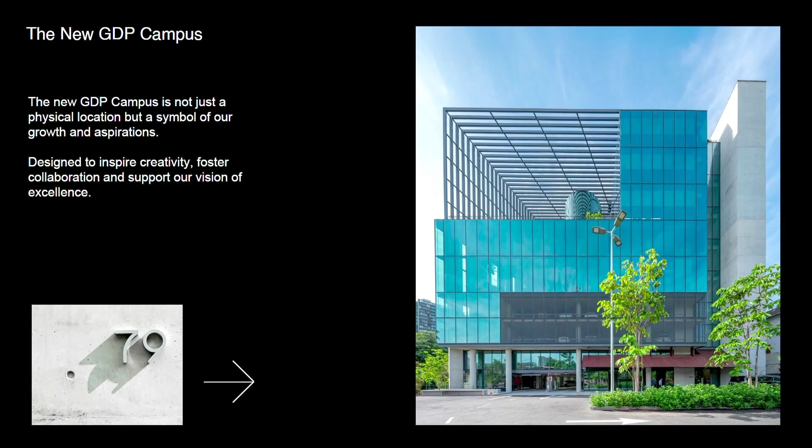So the GDP campus is not just a location. We designed it with the intention that we want to inspire creativity, foster collaboration, and support the vision of excellence. The main thing of putting all GDP employees and staff together is really to encourage collaboration and allow us to work between the floors and between the different studios that we have.

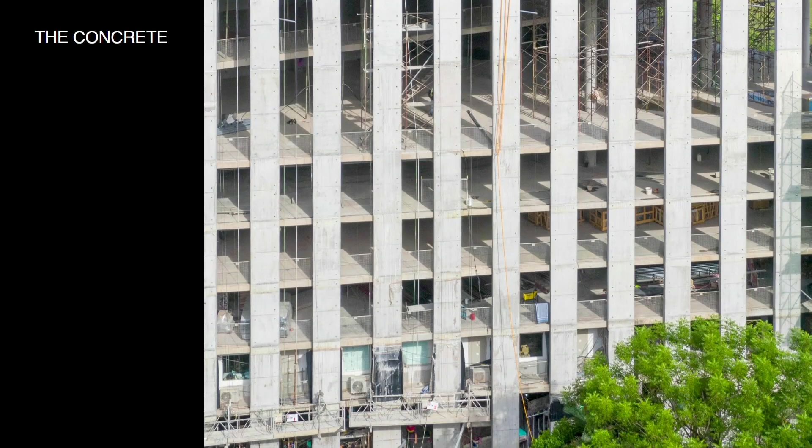So I'd like to talk a bit about the design intent of the project. When we started the project, because it's a project by GDP for GDP, we had the intention to explore raw material, exploring how to push the boundaries for concrete, steel, timber, and glass. So today I will talk about the concrete, which is the title of the presentation today.

Regarding the concrete, what is good to note is that we use different concrete grades for horizontal members and vertical members. The horizontal members, which are the slabs, are in grade 35 concrete, and the vertical members are in grade 50 concrete. I think Pekha will explain more about the concrete strength and how concrete grade is important here.

The formwork. The formwork is what characterizes the concrete that we see. It is the formwork that gives the surface finish, because the formwork, similar to a cake, is the mold. It then reveals what we'll see underneath it.

For this project, there was a lot of discussion about what type of formwork to use, and we moved forward with the Peri formwork, mainly because of its modular system, its quality, its straightness, and the durability and possibility to reuse. Peri formwork can be reused roughly up to 8 times.

What is interesting about the formwork is that we have to be very mindful of the panel sizes they come in, 1220 by 2440, and how we have curated the entire concrete envelope, including the structure, to align with all these alignments.

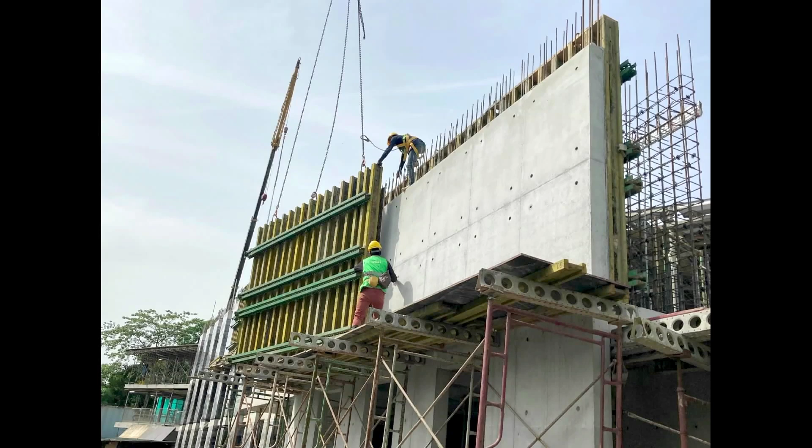This is some process showing how the concrete is cast. You can see some detailed drawings from the contractor showing how the formwork is put together and held in place. There are supports, tied together by tie rods, before the rebars are placed and the concrete is poured in.

In this project, we tried to get rid of the double joint line created by the slab, in order to see a smooth transition and consistency across the big paneling of the elevation.

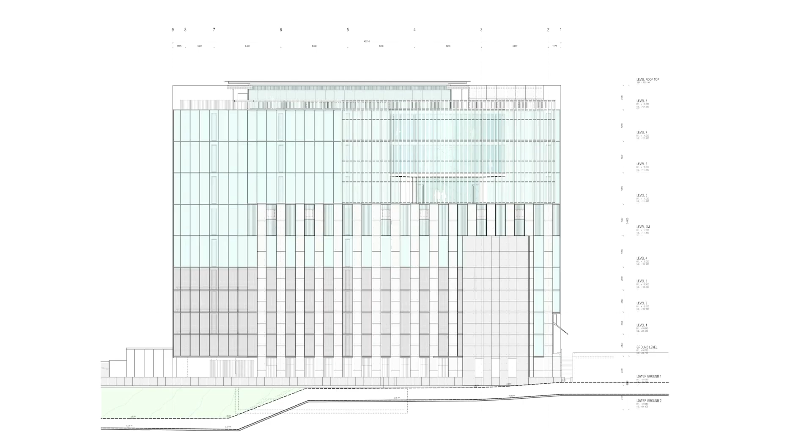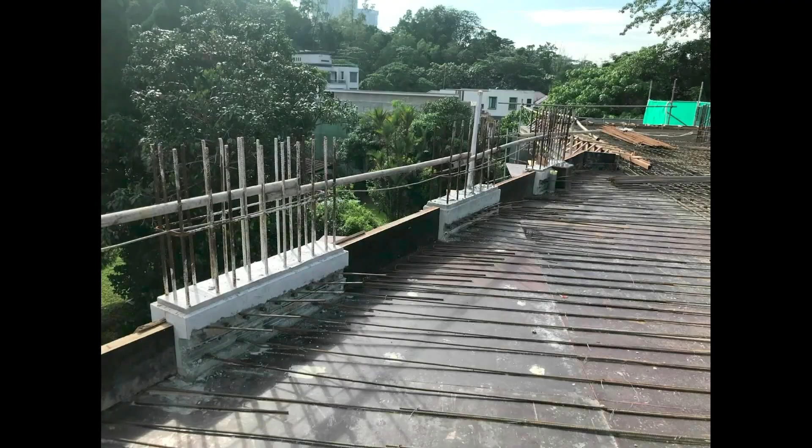This image shows the finished column with the concrete cast, and you can see the coupler box embedded in there. What we need to do is hack out the concrete around the coupler box to remove this polystyrene coupler box. This is the situation after it's been removed.

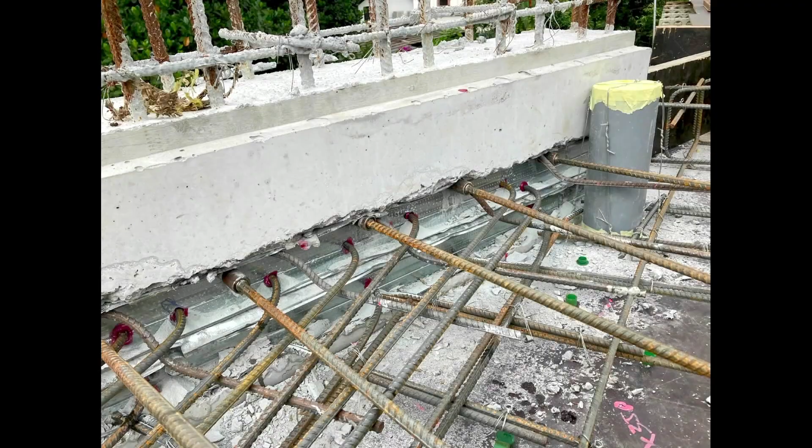You can see there are a lot of couplers there, which allow the rebars to be inserted so that the rebar previously planted within the column is continuous, joined by the coupler into the slab. This image shows how the double line from the slab is not shown on the elevational concrete wall.

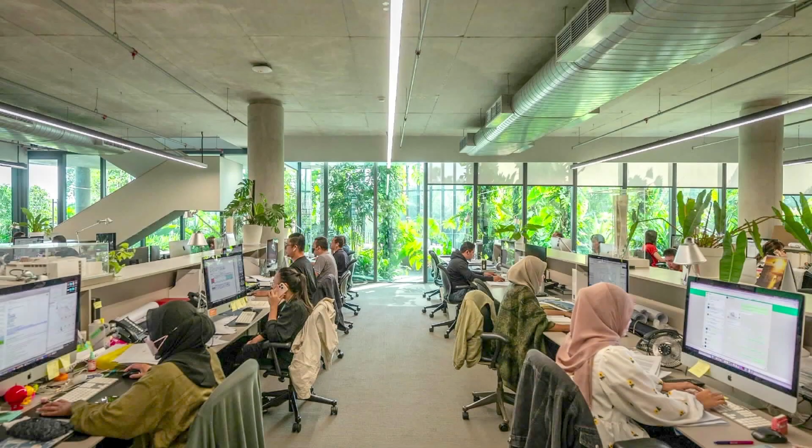You can see that we even decided how to set out the formwork, which imprints these joint lines onto the soffit of our exposed ceiling. Decisions were made from the car park level up to the office level. These images show the joint lines interacting with the facade lines. That's a double volume space on level 4.

Similar in the car park as well, interfacing with where we have the van block. So, talking about the image here just now, the team, we have decided to proceed with a flat slab without any beams. The whole reason is to allow a free interaction and organization with the MEP services. Okay.

So I think on the flat slab, Becca would give you more information about the pre-camber slab. She will possibly talk more about that. So this is an image showing how a flat slab was incorporated in the design to allow the services to be arranged with the concrete.

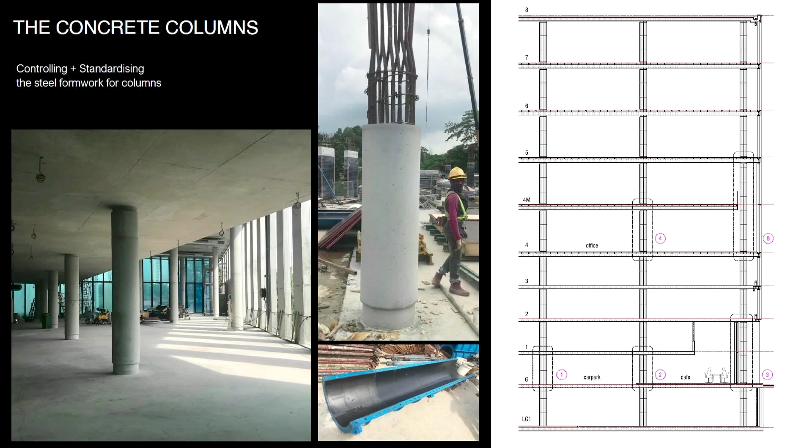Columns. Columns is another challenge that we face in the project. Different from the beams, different from the square columns or the casting of the wall and the slab, these round columns, we use metal formwork, okay? And there was a lot of discussion about sizes, yeah? Sizes and how many modules in order to meet the most cost-effective method.

Okay. So like I mentioned just now, there are a couple of column modules that have been designed into the project. On the ground floor, we have modules with necking and without necking of different height, and mainly it's about different height. How we standardize this is to keep them to certain sizes and allow the formwork to be reused on different levels by adding props to the bottom and the top for the necking.

Okay, we made a decision to ensure the 1220 height of the joint, in order to allow it to repeat itself, being different from the envelope of the building. So you can see how the columns sit more individually. If you're in the space, you could read the joint line differently compared to the envelope.

Okay, so after the column finish and all that, I just want to show this image about the protection that has been put on all the concrete on site. This is mainly about the protection towards the air, water, and damage that might potentially happen on site.

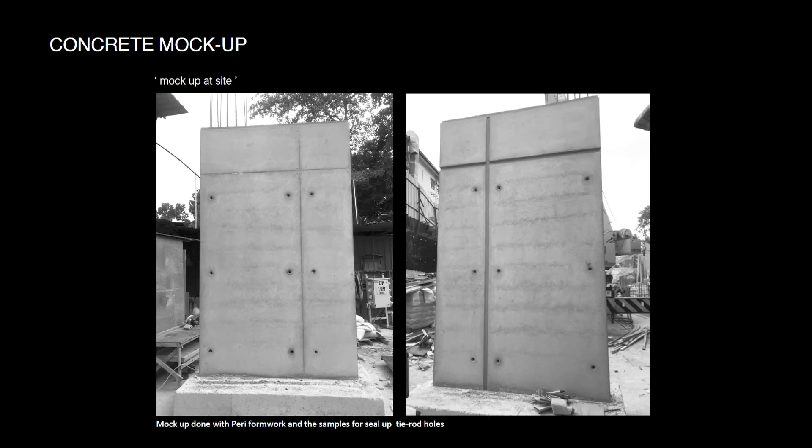The tie rods. Those are all important, and those are great conversations that we have with the contractor, because they have a certain distance that needs to be kept from the edge of the panels. Okay, so from there, this is a good result that we achieved before we moved on to the concrete construction of the project.

This image shows the string there, which is showing the setting out of the tie rods, as well as the bottle there, which is an important factor for the concrete construction. This is the formwork oil, which is applied on the PERI formwork as well as the metal formwork for the concrete column. With the application of this oil, brushed on, it allows easy removal of the formwork.

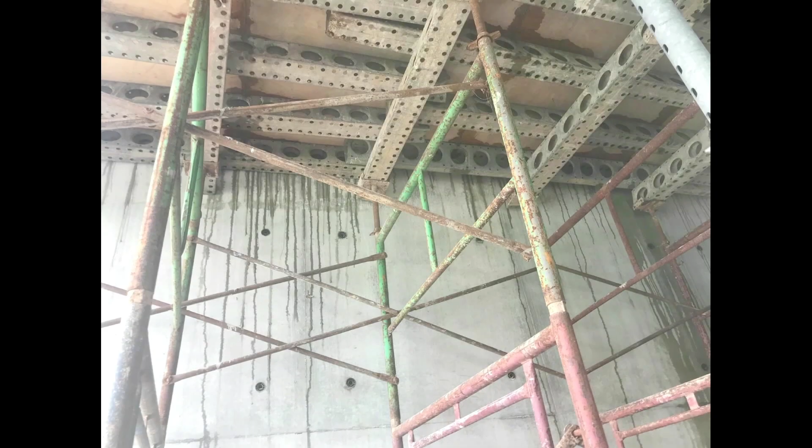Similar to this, concrete dripping that is formed from the foam and the sponge, as we call it, that is integrated during the casting of the concrete within the formwork. Yep. Another defect that was quite major in the project was honeycomb. There was one column where there was significant honeycomb.

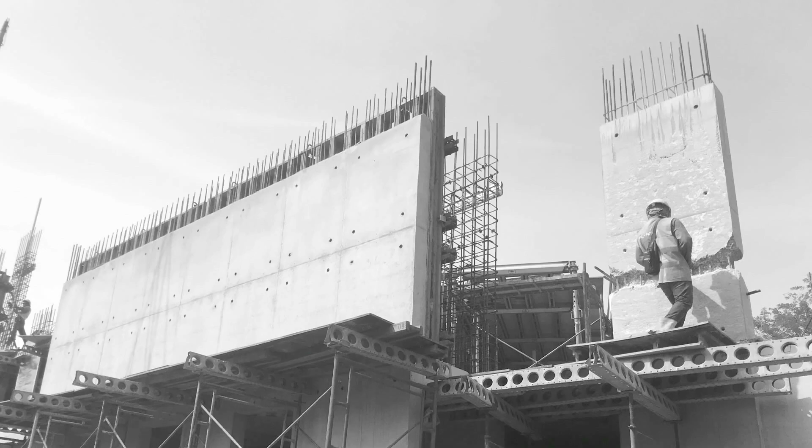Okay, you can see on the bottom part of the column, where we then took a decision to demolish it. And the demolition process is not simple, because you can't demolish the entire column easily. So what the team have done is to demolish almost the lower part of it, then cut off the rebar, and you can throw away the top part of the concrete column, and the bottom bit that's left will be hacked away, and then a new column will have to come up.

What these gentlemen are looking at here is a cold joint. A cold joint that happened on the grade 50 concrete due to the timing of the pouring. So when the concrete is poured too late, a cold joint will happen. So what is interesting here is you see this worker here holding a dryer.

So there are some repair methods that we have implemented in the project. Okay, some special technique from Al-Ambia. Yep, it's very interesting, but I think it's sort of a trade secret. What we do here is with this repair method, we are able to bring the concrete back to a more aesthetic and appealing scenario, similar to off-form concrete and fair face concrete.

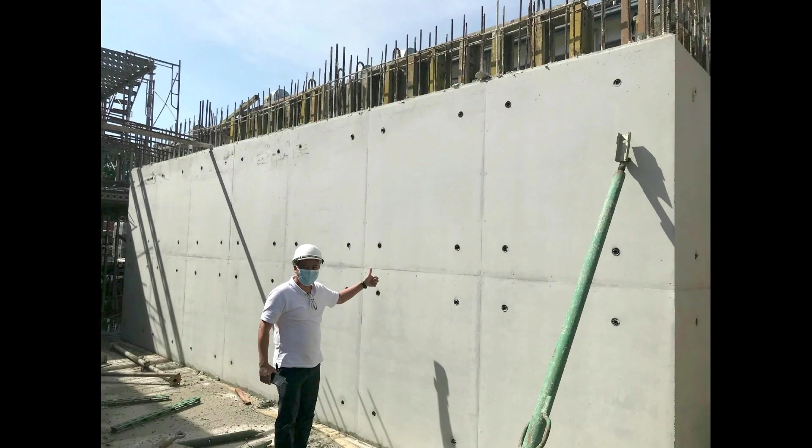Yeah, so a colleague here giving a thumbs up. I'm not sure if you can see here in this image.

What is also interesting is the setting out of the nails. That's also another huge discussion between the architect and the contractor in where and how and aligning all the nails in order to make sure of the alignment and how you feel when we are next to the concrete wall.

Okay. Next interesting part is the tie rods. So all these holes that are formed from the tie rods of the formwork. This is just showing two different tie rod shapes, formed by a straight tie rod and a round tie rod. This is what we did to study this during the mock-up session.

Another major decision that we have made is relevant to the implementation of the surface sealant on the exterior concrete. What we want to achieve is a continuity of concrete between the interior and exterior. However, due to the requirements of our weather, from rain and water, there is an important layer, which is this water repellent layer, which is being applied on the surface of the exterior concrete.

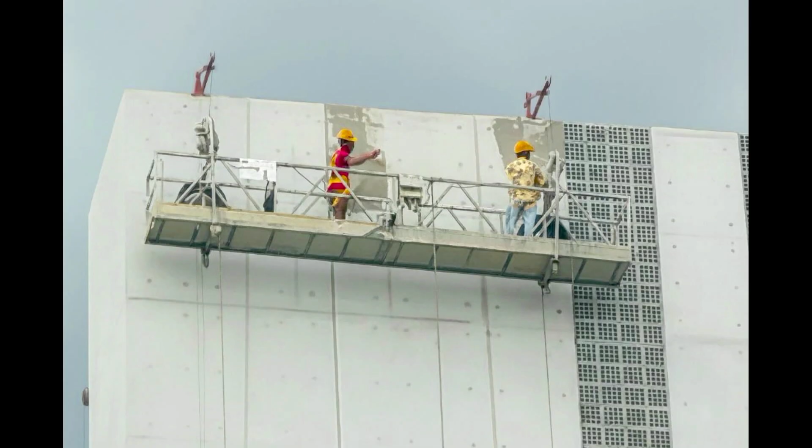So what is interesting about this surface sealant is that it is sort of a transparent layer. However, when you apply it, it creates a creamy looking aesthetic, which, you know, do not be too afraid of, because over time, within the next 28 days, it will disappear and be absorbed into the concrete. So in the end, it will give a very transparent look, which is shown in our project.

So like a lot of concrete construction in KL, what is important is the coordination, early coordination between the concrete and all the other elements of the project. Besides the concrete, the glass facade forms a big part of the entire GDP campus. So there's an important need to create this coordination in terms of design and alignment, which I mentioned just now, as well as a lot of cast-in that we have to do in order to allow the facade to be supported and sitting properly on the perimeter.

Next big thing that the capsule can show very greatly is the coordination with structure. So besides the concrete structure, there is also a steel structure which is embedded within the capsule. The steel structure is only on the slab level because there are steel beams being incorporated within the concrete, as well as gelling together with the concrete columns on what we call the landscape level. And this structure is then supported by slim steel columns. You can see here on the first and second level.

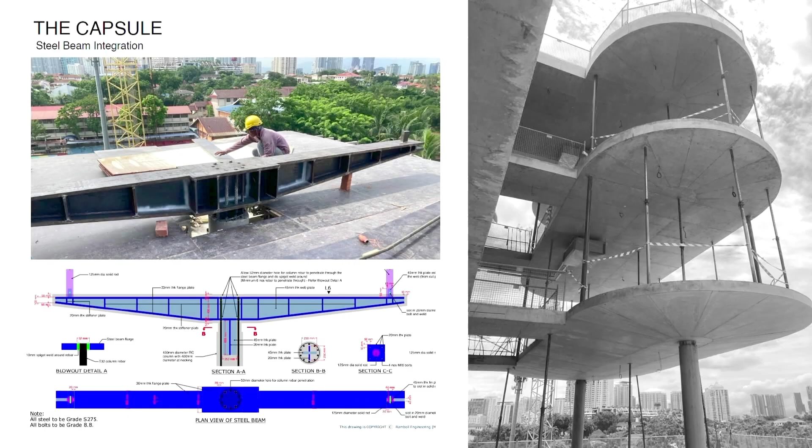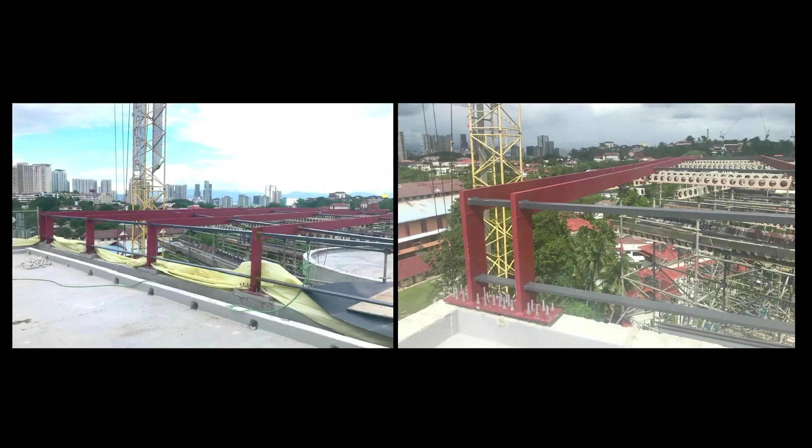So what we have here is this steel structure, which from this sketch you can see that there are some cast-in bolts as well as post-drilled bolts in order to react to the condition on site. Yeah, on the landscape level and also on level 8, which are the two locations supporting the steel trellis. Okay. So that's the end result, where you see the trellis from level 9.

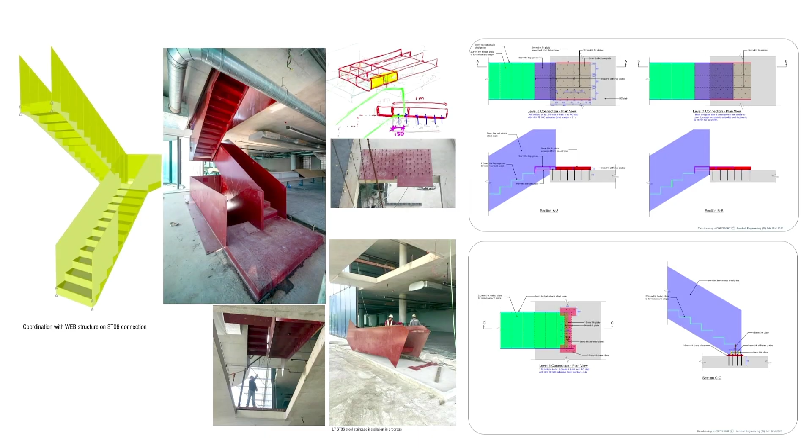Now that we talk a lot about how we want to encourage transition between our people, our staff, the steel staircase, which is within levels 6, 7, 8, which is our office level, is a very important circulation to allow people to move around and collaborate. Similar to other engineering of the project, this is another marvel where the bolts are post-drilled onto it. Some site photos, working with Pek Har and the team.

Okay, so in a concrete construction, and especially in a high-rise, not too high for the GDP campus, one interesting part of the project is the lift. It's a lift that runs through all the levels. And the contractor did a very good job in the plumbing and setting up, in order to get a straightness for the shaft, for the lift car, as well as the lift openings for the doors to be incorporated. So I think there's a lot of discussion on this, a lot of coordination, but at the end of the day, the plumbing line was the one that allowed things to be set out accurately.

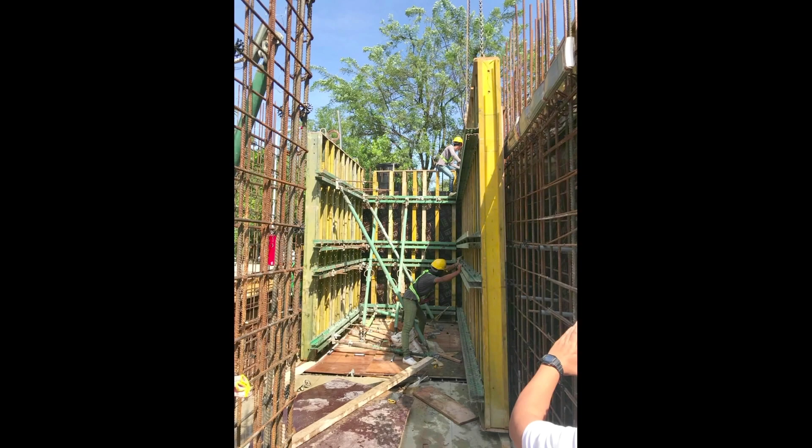Some image showing the formwork within the lift shaft. What we have used is integration of this stainless steel plate as well as some grouting in order to absorb the minor discrepancy in between each level. However, the doors, the lift doors, will still have to be set to be accurate for every single level.

This image here shows people standing around here looking at the ceiling, looking at the soffit. What is going on here is a mock-up. It's a mock-up where we put together the services in order to understand things that we would be integrating within the concrete structure and things that would be exposed. Okay.

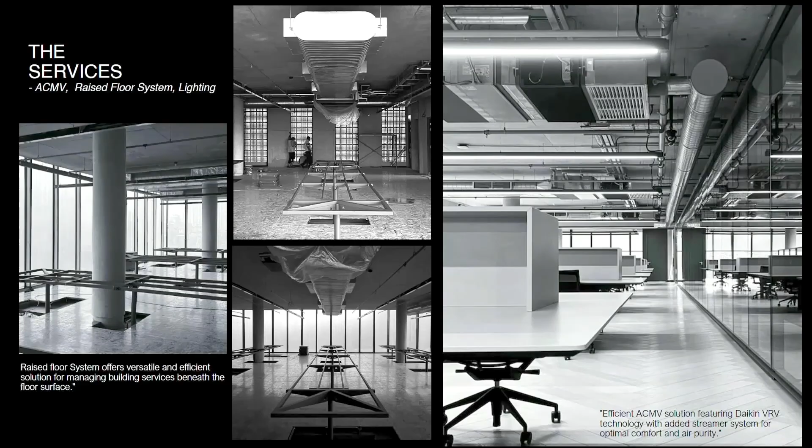Yeah. So here are the services. The ductings, some fire sprinklers, pipes, and some cables, mainly the fire services, which are exposed. Lighting cables, you can see here, are being integrated within the concrete slab. Similar to socket boxes, electrical socket boxes being integrated together with the concrete construction.

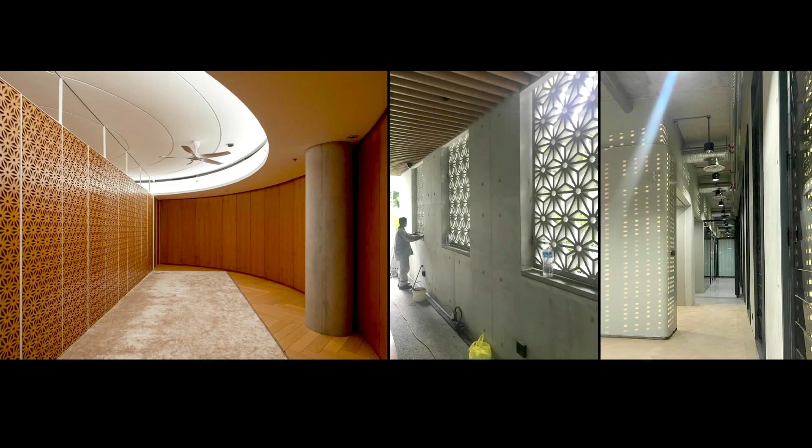Next is the ID part. There are IDs which are being designed and integrated together with the entire concrete framework. Other IDs in the project? Yeah, so I think the way we look at the GDP campus is to create a balance between the use of concrete as well as all the other elements in the project. Okay, so to review how the concrete could be a backdrop as well as supporting the whole design intent, working together with all the alignments in the project.

You can see here the landscape area. Level 4, which is the meetings area and public area.

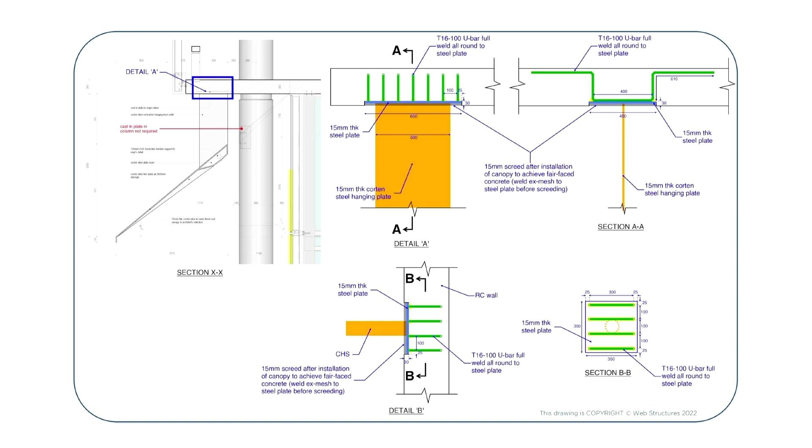Talking about the entrance, this is another integration that we have worked on together with the structural engineers in order to cast in the structural members before the casting of the concrete. You can see here how the steel support is being cast in, where these rectangle holes will then be filled up, covered up to create a continuous look between the concrete and only the slim profile of the metal, like achieved in this image. Okay. All right. Thank you.

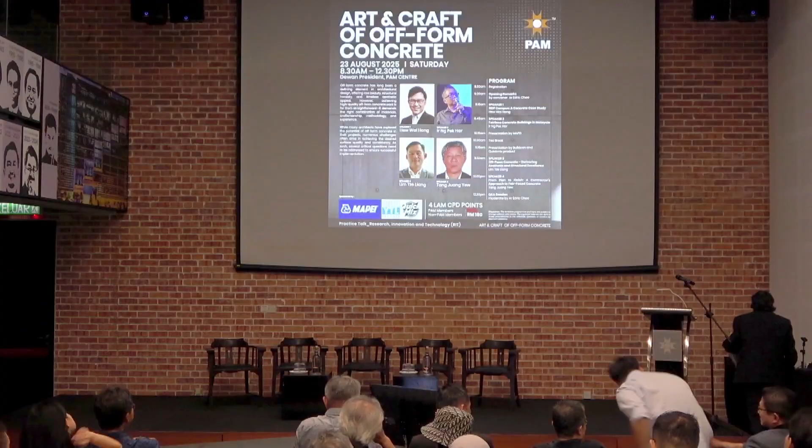Thank you once again, Mr. Hew Wai Hong, who graduated previously, as mentioned, from Bartlett, UCL, with a Master's in Architecture and became a registered architect with ARB in 2018. He joined GDP Architects in 2020 and recently worked on the Apple Store and the wonderful GDP campus you just saw a moment ago. So let's give him another round of applause. Thank you for the insightful presentation.

Up next, our second speaker is Engineer Ng Pek Har with a presentation titled Fair Face Concrete Buildings in Malaysia. So a little bit of a bio before I formally invite our speaker. Together with Dr. Hanif Kara... Web Structures' founder, Pek Har started the Web Structures Kuala Lumpur office in 2004 and built the Web Structures reputation in Malaysia until January 2020 when Web was acquired. She continues her passion in design, and without further ado, I'd like to invite Engineer Ng Pek Har to please come on stage to give her presentation.

Okay, the second thing that was really very interesting for us is actually the trellis. I'm not boasting, I need to say this. It's a triangle shape on plan, but at the long span, the span is 22 meters. It goes across 22 meters like that, right? And guess what? It's only a steel plate that is 200 mm deep. So there's no engineers here, I suppose, except for Mr. Lim. The slenderness ratio is 100. It's crazy. The slenderness ratio is 100, when something is considered slender when it is like 30 or 40.

And the thickness of the steel plate is only 45 mm. In fact, it was so wobbly, and the steel plate comes down to the very tall columns you see going up, so wobbly that the steel fabricator, Mr. Tang, you recall, Pelanta Insan, refused to bring it to your site because they said it's so wobbly they can't even load it onto the lorry. So I was dragged by GDP all the way to, I forgot where, to load these things and to say that they are okay. So that's my memory of this project.

Okay, I think I better start my talk. Okay, how do I do this? Press. Okay, is it here?

Fantastic builders. Actually, after the era of Julius Caesar, the knowledge of concrete was lost for more than 1,400 years. That's why you see there were no great buildings until a huge revival around the year 1840, the 19th century, because an English gentleman, sorry I forgot his name, Joseph something, invented cement as we know it today, Portland cement, because the look and the texture of it looks like Portland stone in the UK.

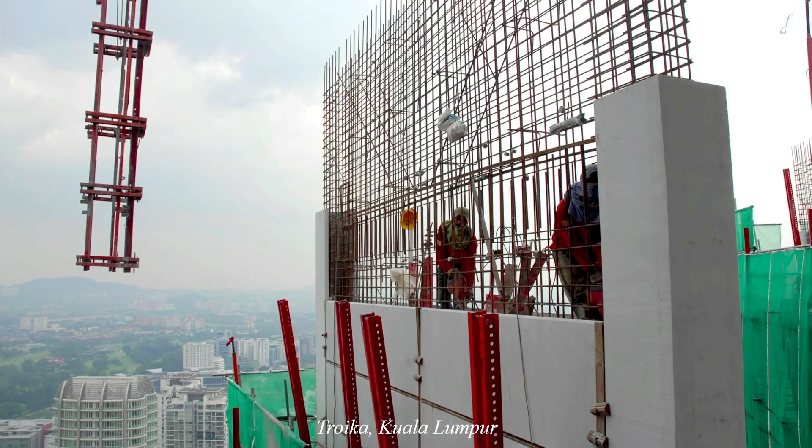Okay, you see this? I think it's not allowed today to have men inside the rebar cage, okay? But this is 2005. So in 2005, the first thing you see is that the precast panels, the 65 mm thick precast panels with the end caps, are there. And these precast panels are about 1.5 meters by 3.2 meters, okay?

So it sounds very easy. You just make lots of them off-site, you bring them here and you just put them up. But you can't just put them up. It's very hard to make them level and aligned, especially at such high heights. You can't lift any of this. If any of you try pulling up the precast cover of the drain, we can't even lift it, right? So how do you lift it up? You lift it up with those orange things.

That means the contractor, IJM, had to build what they call a strong back, made of that orange steel frame, just like you lift glass, you know? Then you tie them to this, and then the crane lifts them up. I forgot to mention, the architect we worked with was GDP together with Foster and Partners. And the tolerance from one end of the wall to another, guess how much it was? 3 millimeters. Mr. Contractor, you almost die. 3 millimeters, okay? So anyway, that's what it is.

And what are these men in the cage doing? All right, the in-situ concrete is just normal. It's the rebars you see going up. But why do we need men in the cage? The reason is this. Foster and GDP were very worried that the panels would drop off. If you just have plain panels like that, they just bond via some cement bonding to the in-situ. It might drop off, and that'd be serious, right?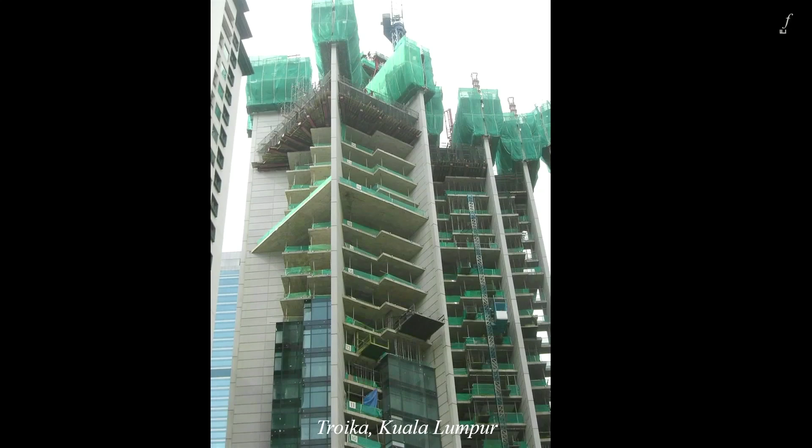So you see, this is the jumping formwork going up. Just now, Hong talked about the couplers. I'll show you the problem with the coupler in this building. This is a zoom in. Can you see? The men in the wall were pulling, making it straight. You fold it in just like that bar there, and when you're in the wall, you have to pull it straight so that it can anchor into the in-situ concrete in the middle. Yeah, some of them being pulled straight.

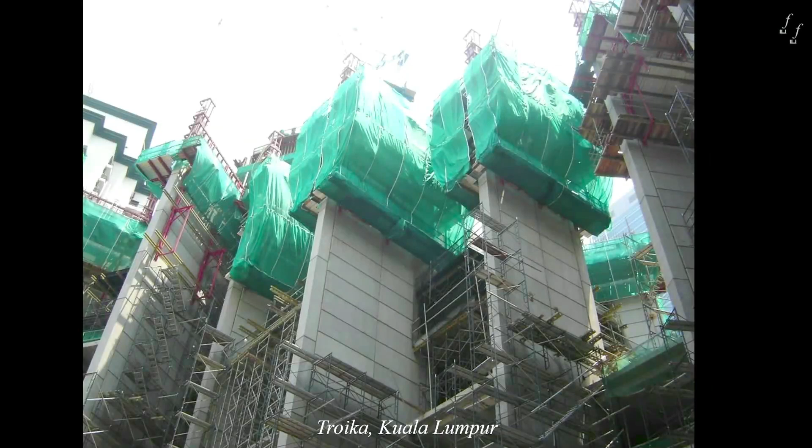Okay. This is what I tell you. It's not so simple. There are so many types of panels. Do you see at the end there where the slab meets the wall? Now, Hong talked about the interface just now, what's that called? What box-up was that?

And, okay, sorry, have to show off some structure. Even though some of the slabs span 12 meters flying across from wall to wall, the connectivity with the wall sometimes is only 600 by 600. Good one, right? Yeah. So flat slab lah, okay?

Okay, one word about flat slab. Since the 31st of December 2021, Malaysia is governed by the seismic code. There is a requirement to design for 7% ground peak acceleration, and flat slabs don't perform well in seismic conditions because of a lot of vibration and twisting and torsion, right? Now, it doesn't mean you can't do it, because Bangkok has a lot of flat slabs, high rises.

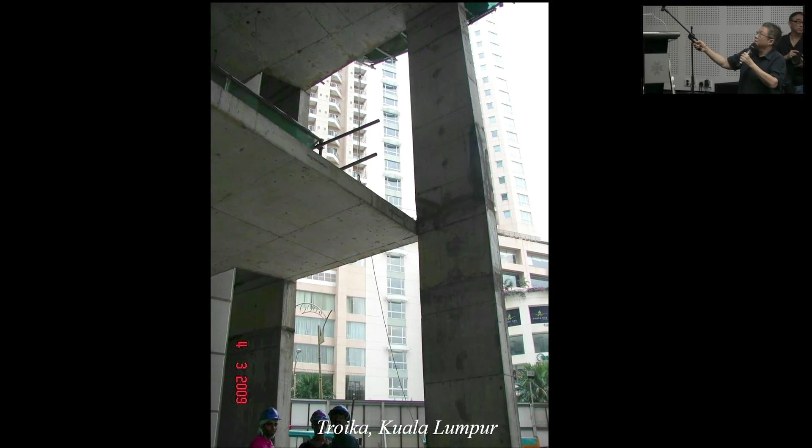This one you must see. Nobody notices it. I'm very sad. Look at the slab. The slab is supposed to sit on the column or whatever, that wall. Does it really sit? It doesn't, you know. Look at that. The corner there just touches. It's not on top. Okay, I'd like all of you architects to ask whoever the engineer is you're working with. Go and do this. It was tough. I won't tell you the secret, okay?

Okay, coupler. This is a nightmare. Why is it a nightmare? It's because, you see, the walls are not aligned. They don't go in an XY grid. So the walls are all eccentric in terms of the orientation and plan, because the architect wanted views, like viewports.

Now, these bars, you see, when you cast these columns, they use the jumping formwork. The walls go up 3 or 4 floors. Then the slab follows 3 or 4 floors behind. So they leave in this coupler. How do I explain a coupler? It's like a bottle cap with screw thread inside. You cast it inside the vertical element so that later the bar, which is threaded, can come and you screw it inside. But you know what's the problem?

The bars that you want to screw in are not perpendicular to the bottle cap that is inside, because the bars are skewed because of the floor. Oh my God, we had such a headache with this, and IGEM was fighting with everyone about this. So I won't tell you the secret again, but I'll give you a hint. You can use recycled wine bottle corks to stuff up that little triangle space so that it doesn't get stuck with concrete. I'm not making any sense, but we can talk about that later if you like.

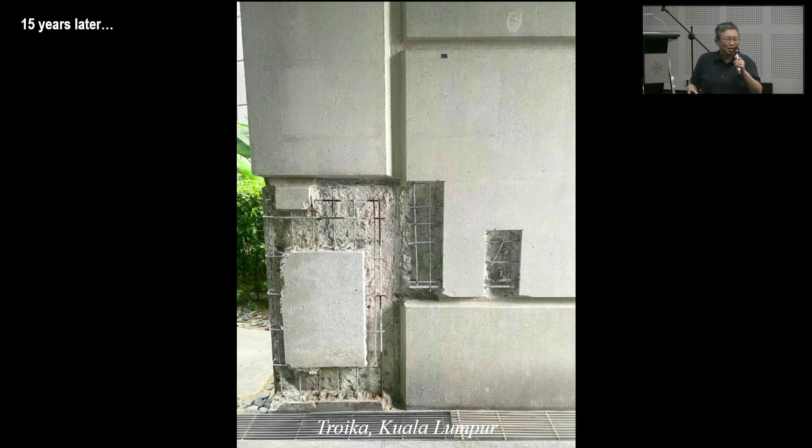So what did the building management do? Not under our advice, on their own, they did this. This is another part, but they hacked it all out until they exposed the rebar that was inside the precast panel. This is the rebar inside the 65 mm thick precast panels, and they hoped to repair this.

But after they've done this, they said, shit, I don't know how to repair it. It's impossible. How can you make it look the same? The beauty and the uniformity of the surface. That's where we are today. JUANG is here, resident, representing building management, asking me, the structural engineer, about what should be an architectural problem.

But never mind, okay? We love to extend our scope, okay? Okay, I'll tell you the problem. Very simple. I don't know all these details because it was spec'd by the architect, okay? First and foremost, these panels are just concrete panels and they're so beautiful that no need to do anything to them, right?

There was, in my memory, a concrete sealing coat, water-based concrete sealing coat. I think the one Hong you showed just now is a hydrophobic one that repels the water. This one, I don't know. I can't remember. I think nobody told us anyway what they use, but I know it's water based. I guess it's also hydrophobic. I guess lah, but it doesn't matter. But can I tell you, it doesn't work. It doesn't work. Why? Because of the humidity in Malaysia.

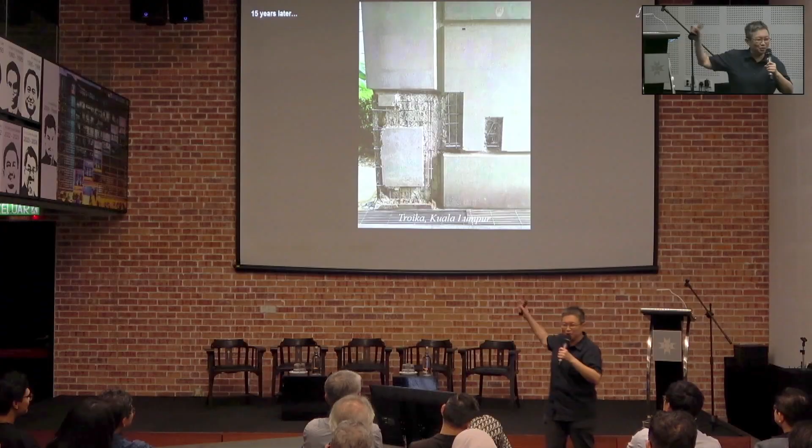Now, sorry to say this, MAPEI, I think you're here and sponsored too. I think I'm talking to the wrong people anyway. Or Fosroc or Sika or whoever, okay? So you say, okay, can repair, we have MAPEI product. So what's the product? Go to this rebar, hack off whatever loose concrete, brush, clean, shiny, paint Ferracoat, FerroGard, Sika, MAPEI, whatever. Then patch back with super duper whatever lah, for Sika it's called Monotop, MAPEI another name. Put all this, then very happy. Maximum time you can be happy, 3 years. It will happen again, and again, and again.

And how do I know this? Not because of Troika. I think most people know us for designing flat slab high-rise, but you don't know something else that we do. We are just problem solvers, okay? So this client has this resort called Ritz-Carlton Langkawi. It's a resort, it's not high-rise, right? We didn't do this building. We know nothing about it, but the client one day just called up and said, we hear that you can solve problems. So this is the problem that we have.

The Ritz-Carlton Langkawi has the highest room rental rates in the country. It rents for about 2,500 Malaysian ringgit per night. And guess what?

All these rust things you see in the concrete happened 1 month before the contractor handed over the project. That means not even after handover, how many years? Okay, then, see? Look at that. You can see all the rebar. You see, the concrete has spalled off. The spalling problem that I told you about just now.

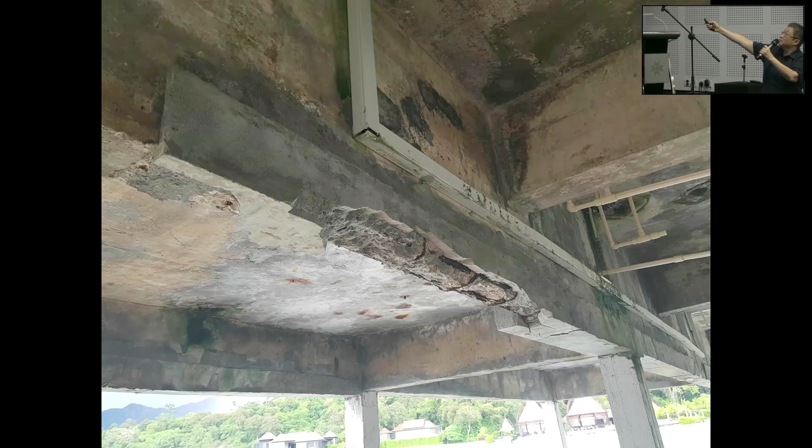Then you say it's because of the sea. Don't blame the sea, okay? It will happen faster near the sea, but it will happen here anyway, right? Look at that. As a client, would you like this? 1 month before handover? Guess what? The contractor had repaired already. 2 rounds, failed again a few months later. So the client gave up and called us.

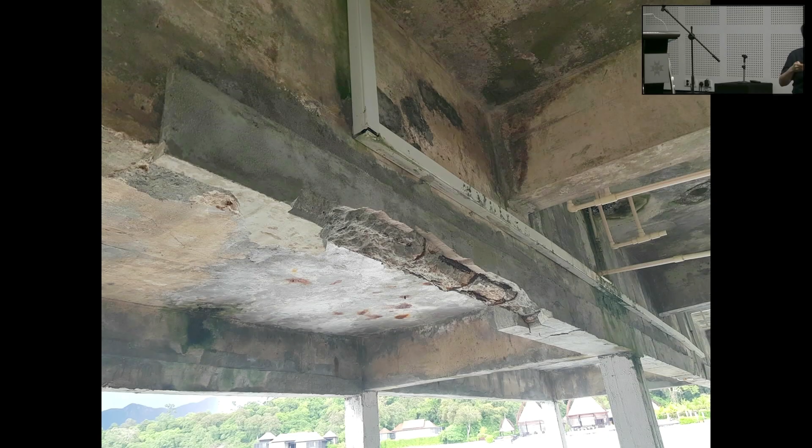Now first and foremost, the workmanship of the concrete is terrible, right, Mr. Lim, Mr. Tang? The cover is not enough, but you know what? Sorry, I hope nobody here is from Langkawi or from an island, but that's what happens on the island. You can't get very good. It's like a cartel, we must only go to one contractor called Mr. Ng in Langkawi. Even if you appoint somebody else, it goes to him. Just believe me, okay? So you see things like that happening.

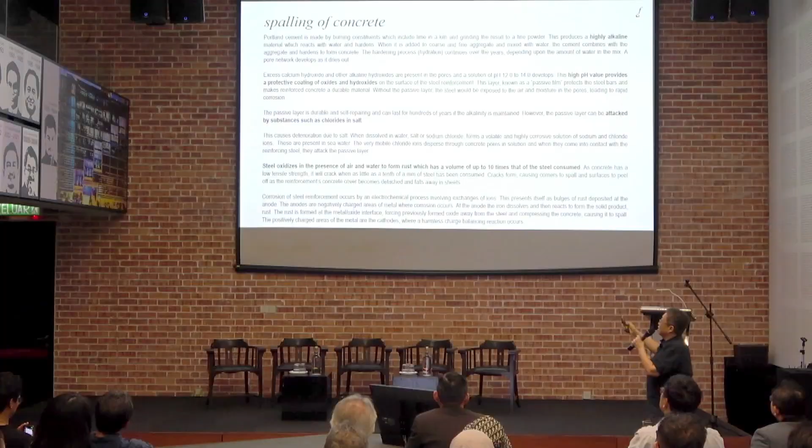And then, seriously, look at this. This looks like it's an ancient building. It should look like the Georgetown jetty, which I forgive, I know it was built in the 1960s. But look at this, okay? I don't want you to read all this. I'll give it to you for free later. I'll explain all this to you later. I just put it here to show you that we actually do some work instead of just talking. So I'll tell you the reason, okay?

The experience that I have dealing with this kind of problem is over a span of 20 years when I was previously with Web Structures, then called Ramboll. I've left Ramboll. And the thing is this, we had a very lucrative job. I can tell you now, now I'm out of it. And the job was also over because I killed it. The client was Mr. Ong Beng Seng, known for the Four Seasons resorts. Mr. Ong and his company HPL Properties have so many resorts in Asia Pacific. For example, he owns 50 resorts in the Maldives alone, all on individual atolls.

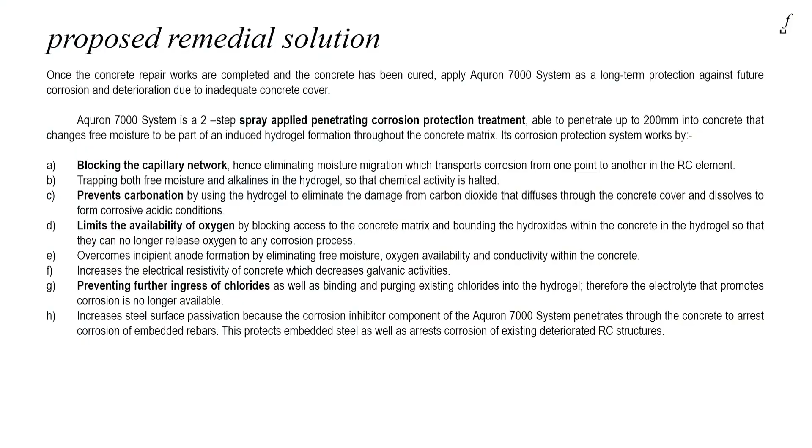Now, the first project that I ever did for them, I don't know whether I have the slide here, I'll try to look for it later. Okay, we'll go back to this later. I'm showing you all high rises. Sorry, guys. I think I don't have it because I left it all with Ramboll Web Structures. So I just have to let you imagine a beautiful blue sky, white sands, and villas on water.

Now, the first Four Seasons resort that I worked on there is called Kuda Huraa. The concrete was all spalling. So we did the standard repair that I told you about using Sika, Mapei, whatever. We were so happy, and he paid us. Very good job. He pays us per hour at USD rates. And we were happy for 3 years. Guess what? After 3 years, the same problem happened. And this continued for 20 years. So I do have some experience in this. And not just on Kuda Huraa, on many resorts. We didn't work on all 50, but at least 12.

Even on buildings that we started from fresh, with the marine additive in the concrete. The Four Seasons resort in the Seychelles, on Petite Anse Bay. We did it for him, 75 hectares. We were the original engineers, we built it from scratch. We did all this, and the problem still happened, right?

So, what's the story, okay? I don't want to show you all this. I think I'm jumping the gun, but I just want to finish what I'm saying, and then we can see all these nice pictures later, okay? As you said, we're not here to see nice pictures, right? Okay. Okay, I want to tell you something. How do you stop this?

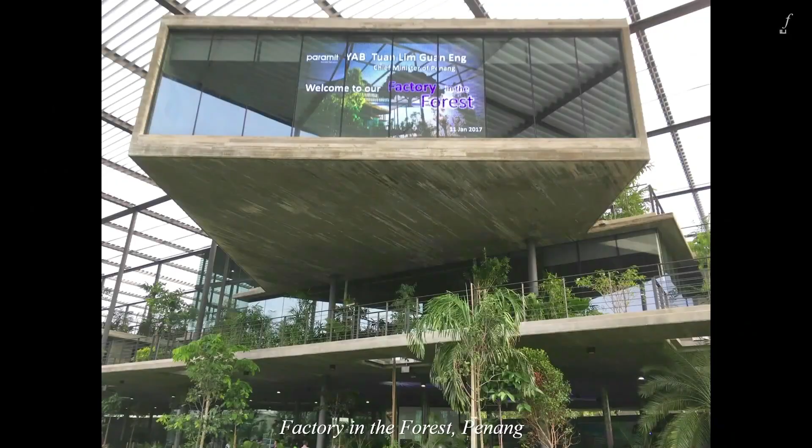Of course, we did this job. I think everybody knows about it. This is the Paramit Factory in the Forest with John Bulcock, the architect. And John always uses plank formwork.

That means the formwork is using the plank finish, so the imprint of the timber plank is on it. And why does he use this? It's very forgiving. So you don't need to make it so smooth, so straight, because it's got this in and out, so it's more forgiving, right? Still hard to do, but much easier to do, okay? Right, Mr. Tang? Okay, so that's it.

We won't talk about the structure. I think I've talked about this very often. Okay, part 7 that we did, where I met you, Mr. Tang, in 2005, right? Very ambitious plan by CSYA, Sunny Chan Architects. The first 19-story cast in situ fairface. Now, precast you can control so that it doesn't look like tandoori bread when you go up. But this is a cast in situ, okay?

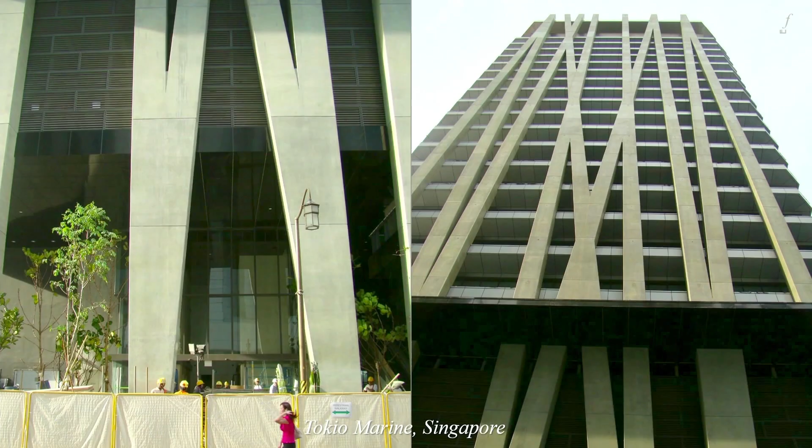Okay, this one I want to show you. This is Tokio Marine Singapore, which we did when we were previously Web Structures. Okay, this is quite like Troika. All these are structural elements, they're not decorative. They support the entire building, and they're actually tilted left and right and leaning a little bit forward and backward.

Now this one, the formwork, 3 sides of the columns are precast panels, forming a C shape or a U shape. And the 4th side is not. It's traditional formwork, then you pour in the cast in situ, okay? But quite well done also. This one also very well done. So far, no problem. So all these are the secrets. They look very boring because architects don't like to see words. That's well and fine. But if you want to understand all this, we'll give you all the contact, or you can Google this yourself.

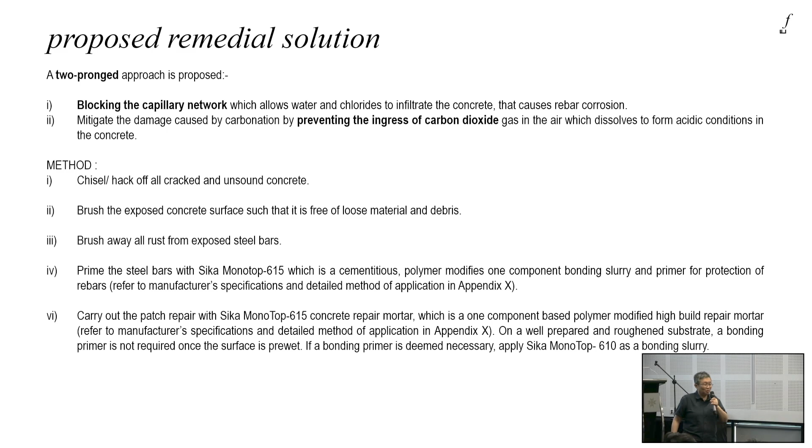Okay, today Aquron 7000 is available in Malaysia. I linked it up with an applicator here, and you can use it. So we make quite good money from solving these kinds of problems, but I would prefer the problems don't happen in the first place. So please try to consider using the Aquron 7000 when you're doing this concrete, then you won't get a headache.

I think for shorter buildings, right, the problem will happen a bit later. If the workmanship is good, it won't happen for even 15 years. But it's very hard to ensure that every contractor is as good as Al-Ambia. It's very difficult, right? Because they tender, then you must get the lowest tenderer, who doesn't know anything, never heard of Peri, never heard of Doka, never heard anything. Okay, so I think that's it. I think I'm ahead of time. Okay.

So thank you so much, Engineer Ng Pek Ha, for your very entertaining presentation. I think we definitely learned a lot as to why those things happen, especially where concrete is concerned.

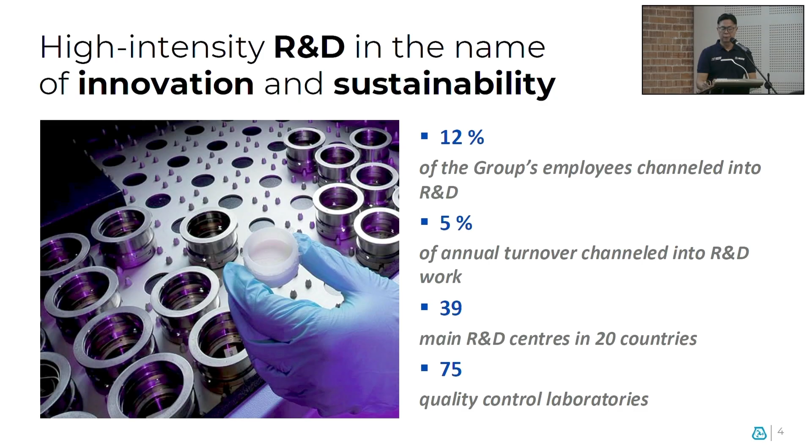So basically, not all companies have invested in R&D, but Mapei believes it is important. We believe in R&D. 5% of our turnover goes into R&D work. And in the Malaysian context, we have our plant here in Nilai. It was fully operational in January 2015.

Mapei Malaysia started in 1994, and this is the plant that we started. Currently we have a plant under construction in Johor. It is at the piling stage now. Right, so in the current Nilai plant, all the cementitious and liquid products are produced here. We also have production, the warehouse, the product development lab, the QC lab and the technical service training room as well.

So as you know, Mapei solutions are across all sectors. Besides new buildings and old buildings, we have solutions even for infrastructure and big marine structures. Right, so today I'll share with you insights on the concrete industry solutions. Basically all project needs are unique, and these applications are performance-based, and we can tailor-make them to the concrete requirements, and our solutions are basically sustainable concrete.

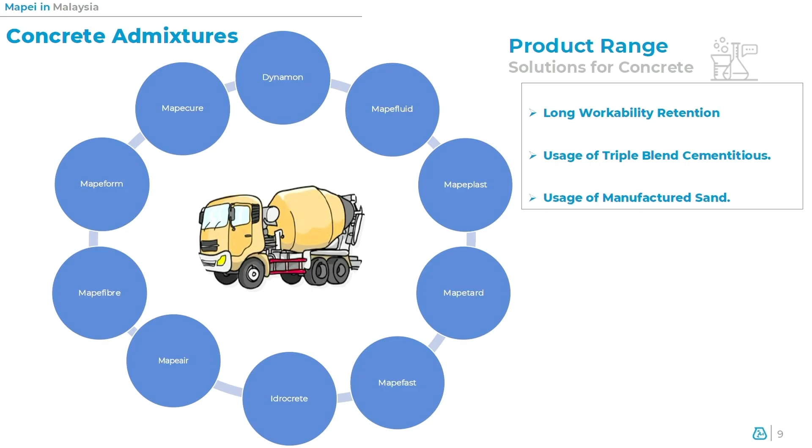And as you can see here, for our concrete admixtures, we have all these solutions. We have silica fume, retarders, admixtures, and synthetic fibers. This product range can extend long workability retention, and also support the usage of triple blend cementitious materials, as well as the usage of manufactured sand.

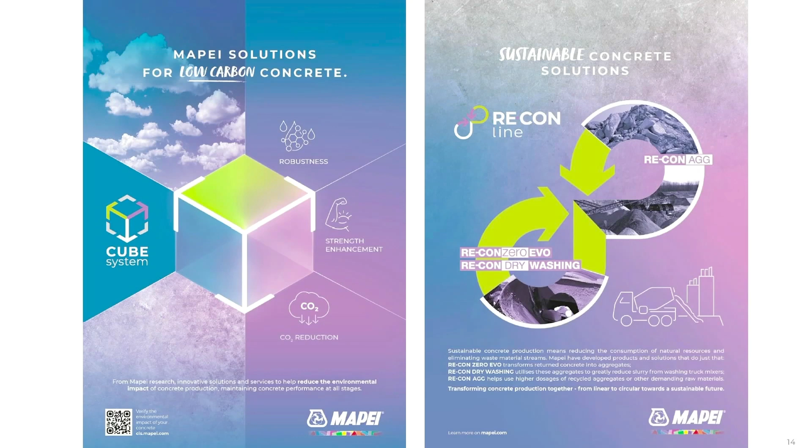And we also have another extension line called the RE-CON line, reconstitution of concrete. Basically, when you have rejections of concrete, they go back to the plant. And the solution is we can add things to reconstitute the product into recon concrete, to minimize the wastage to the environment.

Next, Mapei also developed a carbon footprint calculator, in line with the government's ESG compliance. This carbon footprint calculator is available on our website. Of course, if you need assistance, we can always tailor-make and run this for you, for your projects on the concrete solutions.

Okay, let's take a look at the selected project references for special concrete here.

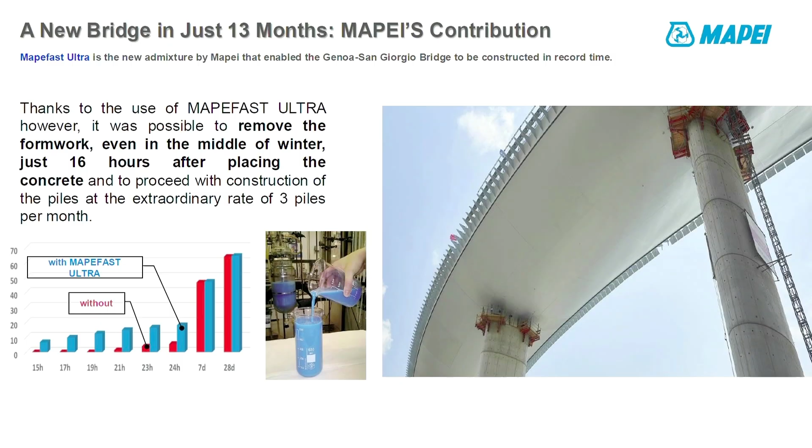Right, one of the global projects that we have done, this is actually back in Italy, our head office. This is the New San Giorgio Bridge in Genoa, Italy. It's a symbol of hope, and it's a new bridge built in just 13 months. So what is interesting about this project? It is using our Mapefast Ultra, which is able to demould after 16 hours of formwork, even in the middle of winter. So that is how our technologies can deliver in just 13 months.

Besides that, we are also involved in the Africa project, the Grand Ethiopian Renaissance Dam project. It's one of the largest dams in the world, and what we supply here is for the roller compacted concrete, or RCC placement.

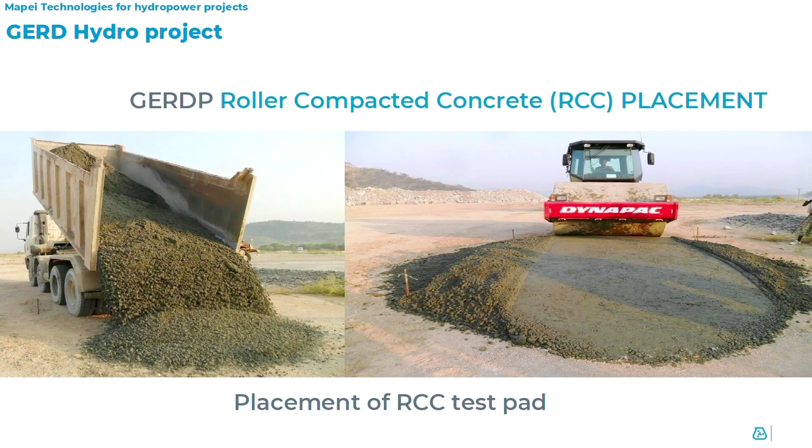Nearer to this part of the world, we have the Tuas Finger Pier project in Singapore. This is a super caisson casting with slip form concrete. We fixed the stiffening time. In slip form construction, the key criterion is to get the stiffening time correct with the other concrete performance.

We have also done this in the Deep Tunnel Sewerage System, or DTSS phase 2 in Singapore. We managed to come up with solutions with microbiologically induced corrosion resistant concrete, or in short, MIC. So these are the sites and the support that we provided for DTSS2 in Singapore.

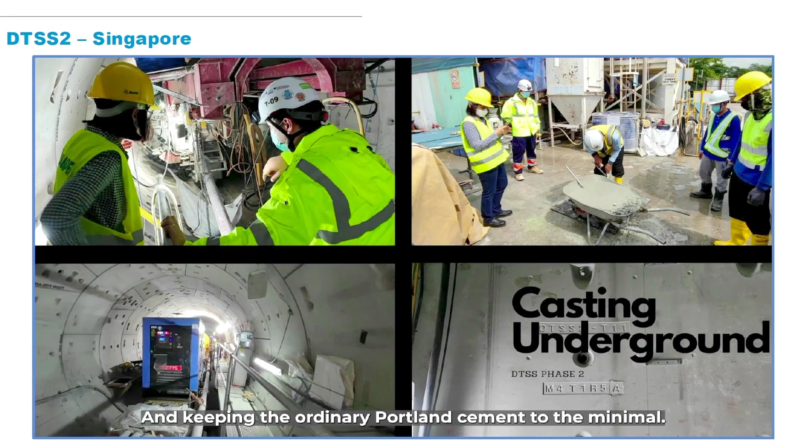Next, closer to home, we have done this for KV-MRT2. All the underground stations are using our hydrophobic waterproofing admixture, called Idrocrete WP. And for your information, we do have crystallizing admixtures as well, called Idrocrete KR1000.

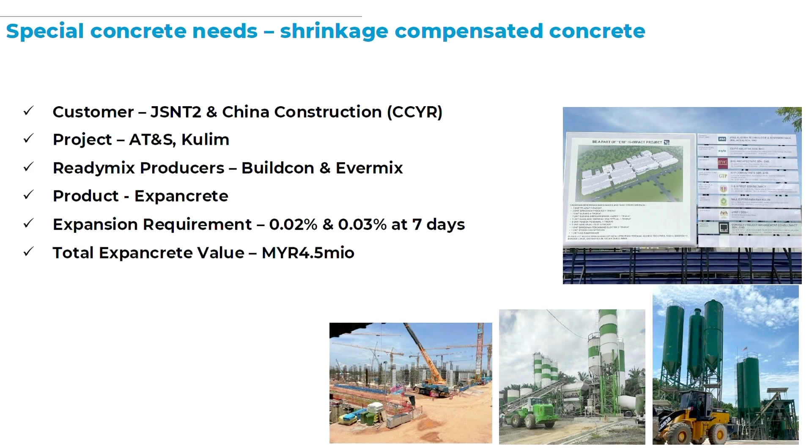There are also some special concrete needs that we have done in shrinkage compensated concrete. We have done this for the customers JSNT2 and China Construction. This project is AT&S in Kulim, a factory. The ready-mix producer is Buildcon, and we produced the Expancrete products for this project.

In conclusion, Mapei's philosophy is simple: let's build more with less. By leveraging research, innovation and sustainable solutions, we can create durable infrastructure, reduce the carbon footprint, and improve the efficiency of construction. Thank you very much.

Before I start, let me give a brief introduction of Quick Mix. Quick Mix falls under YTL Cement as one of its divisions, and all our products have a Sirim Eco label, low VOC, less than 5%, and we are following the ESG trend. For our eco dry mix, we also have our own laboratory. We do our own R&D testing, and for any site complaints and site issues, we have our own lab to test. We don't need to go to a third party, but for certain testing, we do go to third parties.

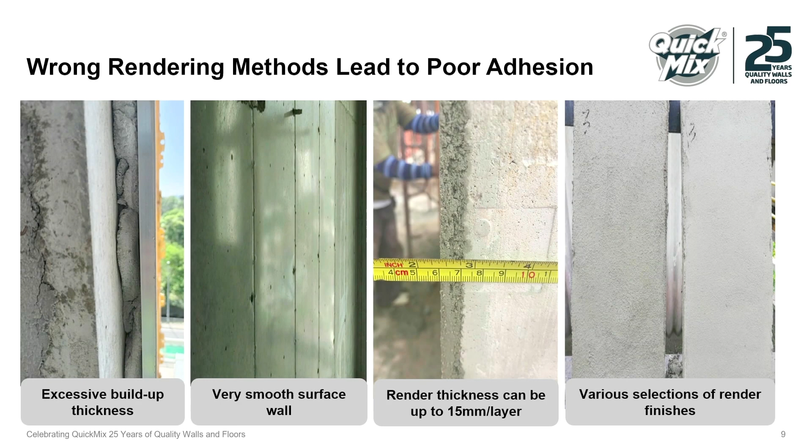Second, delaminations. Delamination, I believe, is a very common issue. It's usually due to excessive build-up, and also a very smooth surface requires another bonding agent or mechanical key coat. So for our render, we have a special render that can do up to 15 mm per layer, and also we have a variety of render finishes.

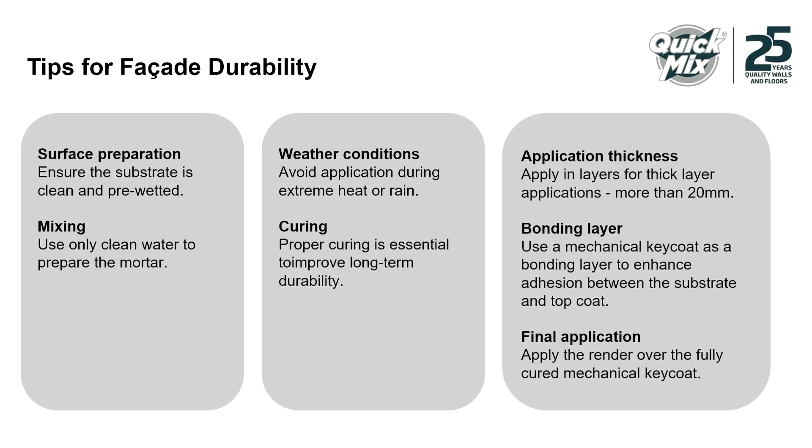If you can see from here, this is just a normal design tip, maybe for the specification guide or the BQ. For renders, you can go up to 10 mm per layer. For example, for our 386 Plus and 387 Plus, we can go up to 20 mm.

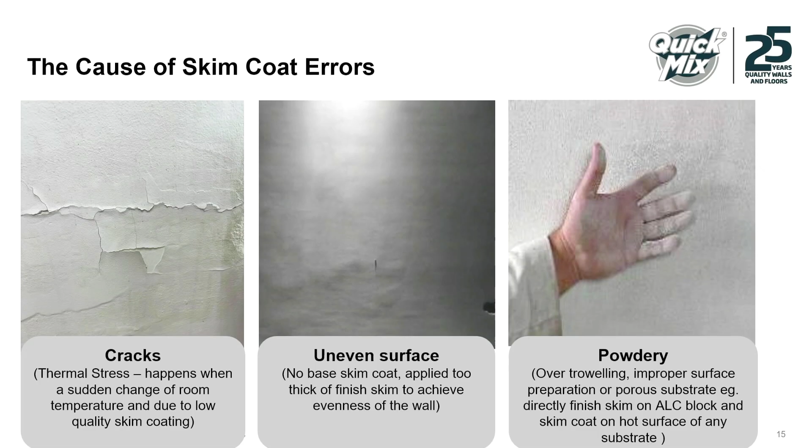The next one after plastering will be skim coat. Skim coat usually has three major issues: cracks, uneven surface, and powdery. So for skim coat, as a manufacturer, we have a general specification. Thickness is 3+2, which means 3 mm base coat, 2 mm finish coat. We follow the thickness to ensure durability and also adhesion. Too thick, you will have powdery issues, or it can debond from the wall.

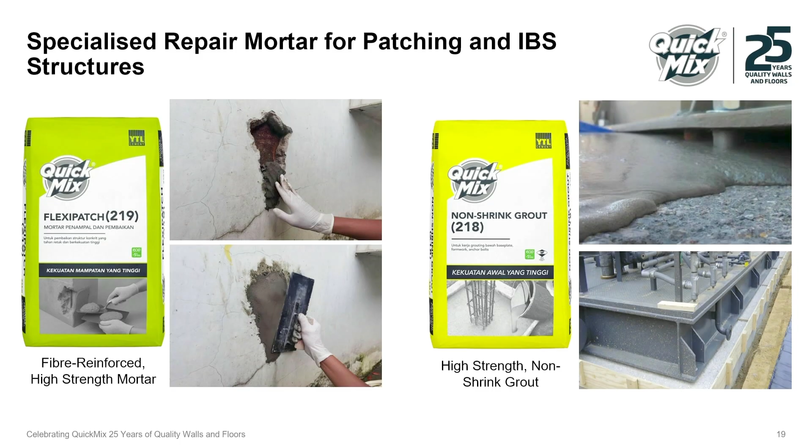Good morning, everyone. Okay, let me start off my presentation today with off-form concrete, delivering aesthetic and structural excellence. So, let me bring you through what is actually an off-form finished concrete. It's actually an exposed cast surface, architectural and structural finish, aesthetic appeal, durable, requires precision, and also supplier and contractor synergy.

So in off-form concrete, why is the concrete supplier important? Our role directly affects surface smoothness, color uniformity, workability and setting time of the concrete, and also a very important part of this is mix design consistency. So let us go through the recommended concrete mix design and workability for us to perform an off-form finish concrete.

So we started with low water cement ratio. As you know, water cement ratio plays a very important part in our concrete mix design. A lower water cement ratio means a higher strength that we can achieve. So if we have a low water cement ratio, the purpose is we try to reduce our bleed water and porosity in our mix, and also less water goes in means fewer capillary voids, which minimizes bug hole formation,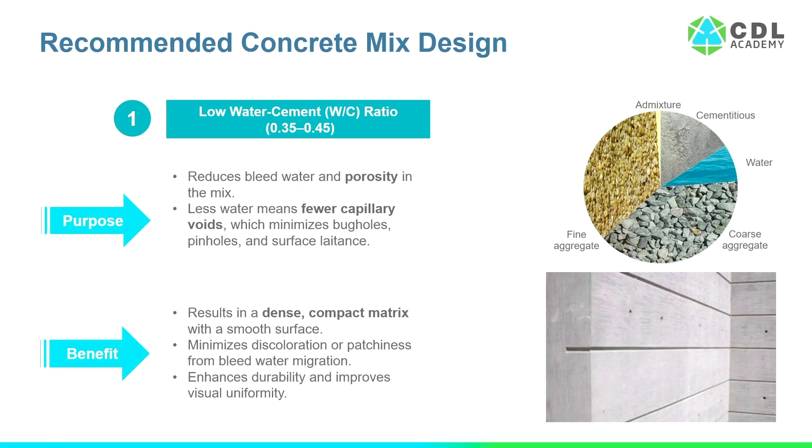pinholes, and surface laitance. So the benefit of this is with lower WC ratio, we can result in a more dense and compact matrix with a smooth surface, and also minimize discoloration or patchiness from bleed water migration to the top of the surface, and enhance durability and improve our visual uniformity.

Recommended concrete mix design is using an admixture that is PCE based. PCE is actually a new generation of superplasticizer and retarder that enhances the workability of concrete without increasing the water content in our mix design. This allows concrete to be easily placed and compacted even at a lower WC ratio. So actually this is a very important key point that I would like to bring out.

It is actually a myth in the market that a low WC ratio, higher strength concrete is normally hard to place into the structure. So by introducing this PCE based admixture, we managed to overcome this issue. So the benefit is high flowability or self-compacting behavior while keeping the mix cohesive and reducing the segregation issue. It also reduces honeycomb, voids, and cold joints in the structures, and also helps us to achieve crisp edge details and defined impressions from the formwork.

So the third point that I would like to bring out today is adding GGBS into the concrete mix design. This GGBS actually refines the microstructure of the concrete, and it also indirectly improves sulfate resistance and long-term durability of our concrete structures.

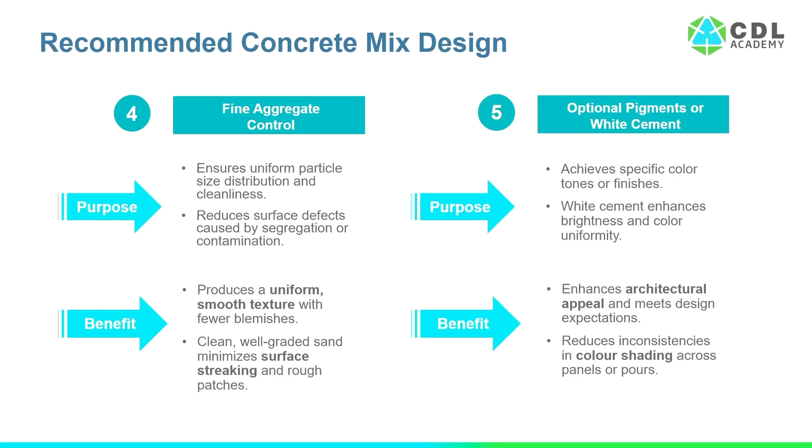So we have optional pigments or white cement to achieve specific color tones or finishes. White cement enhances brightness and color uniformity, and it enhances architectural appeal and meets design requirements. And of course, it also reduces inconsistency; a common problem in our off-form finish is color shading across our panels or pouring area.

workability range. So the benefits of having this slump or workability range are to improve our visual quality with fewer surface defects, enhance the ability to achieve class 1 surface finish, and also reduce surface patching and repair work after we dismantle our formwork.

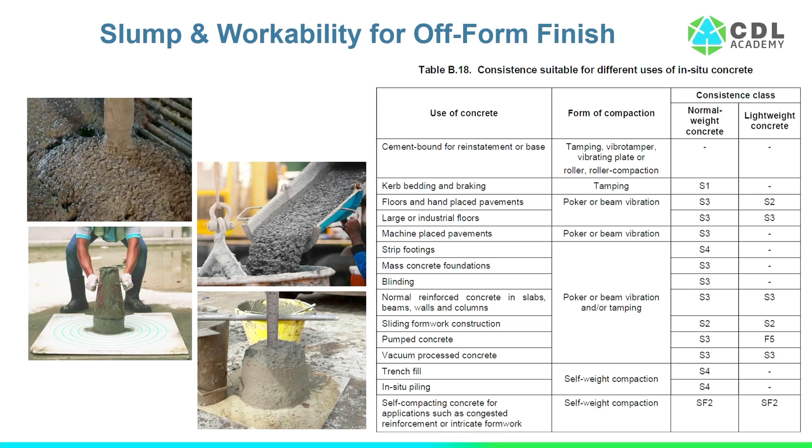So let us share with you some best practices as a supplier. First, we try to maintain tight quality control at the batching plant. That is the most important point. As a ready-mix supplier, we must ensure we have strict control over our raw material selection, for example cement, aggregates, water, and admixtures. And we must ensure batch-to-batch variation is kept to a minimum.

Moisture control in our aggregates is another key control that we have to implement at the batching plant. This is to ensure the intended water-cement ratio is maintained, and to avoid variation that causes defects like laitance or color differences. Third, calibration of our batching plant equipment and weighing scales must be done regularly to ensure precise dosing into our concrete mix. And the last one is control of our mix design; mixing time and discharge sequence help avoid segregation and ensure a homogeneous mix.

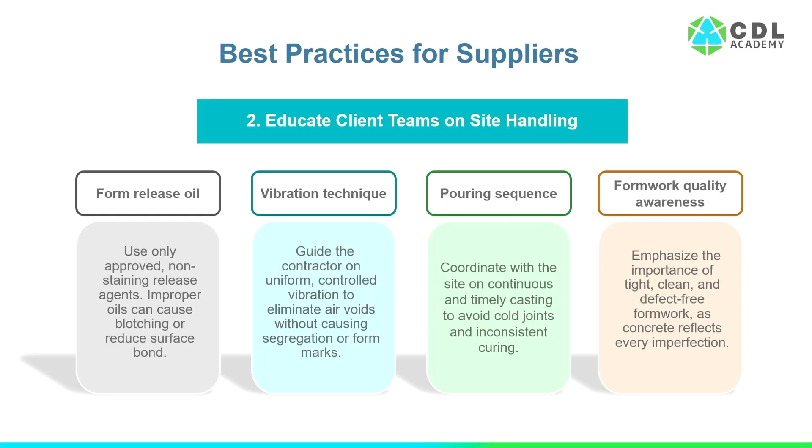For example, to educate our client teams on site handling, we came up with a few points to share. The first one is form release oil. I think that is a key parameter. Later, I think Mr. Tang will agree with me in his presentation that the selection of form release oil is important for us to achieve off-form finish products. Vibration technique and pouring sequence are other important points that I won't touch on much, because Mr. Tang has more experience than us in how to do a pouring sequence, and also formwork quality awareness. During the break we had a brief discussion on this. We will let an expert like Mr. Tang share with us later.

And the last one is technical factors in casting off-form finish. The most important parts are formwork quality and mixing and delivery variables. Mixing duration and sequence influence homogeneity in our concrete mix, and transit time to the job site and drum speed affect our slump consistency.

And temperature control during delivery may be crucial for us to take into consideration, knowing very well that Malaysia has a typical hot climate, so our concrete placing temperature delivered to site can be as high as 35 to 36.

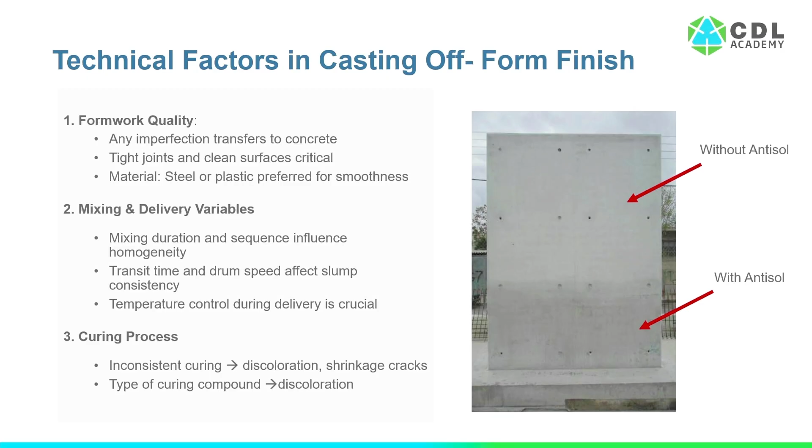Environmental challenges, as I mentioned earlier: rain, which has washout effects and staining on our structures; heat, which causes fast evaporation and crack formation; and humidity affects our concrete setting time as well. Visual considerations: tie rod planning, form lines and joints must be coordinated with the architect, and surface uniformity and reinforcement setup need team coordination and planning with our C&S consultant.

Let me bring you through my last point of the presentation, which is sustainability in off-form concrete. Sustainability in off-form concrete finish means we try to use more eco-friendly approaches, like Portland limestone cement, PLC, supplementary cementitious materials including GGBS and silica fume, and incorporating recycled aggregate in our concrete mix design.

Just for the info of the floor, we actually have the first repurposed concrete center, in collaboration with CREAM, the research arm of CIDB, in Chan Sow Lin, where we try to reuse whatever leftover concrete was sent to the job site and recycle and repurpose it into recycled aggregates. This is to support our circular construction practice.

We use low carbon admixtures, PCE admixtures, as I covered earlier in my presentation, which further minimize the embodied carbon and allow a lower water-cement ratio without sacrificing workability, and also enable cement reduction while maintaining strength and finishing quality.

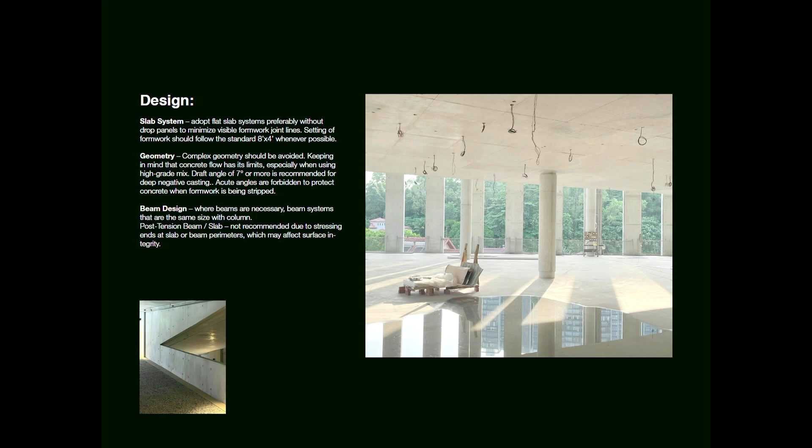Oh, I did move this slide, I think. Anyway, it's slightly different from my things here.

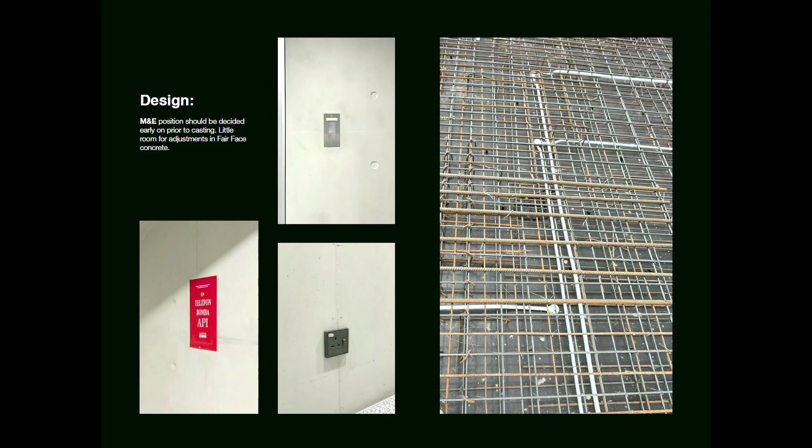The second item we're touching on is material selection. For fair face concrete, actually steel mold is not recommended because the steel mold, after a few times used with vibration, will deform. It's very difficult to get the steel mold as flat as a plywood.

So plywood, unfortunately in Malaysia, we are unable to obtain first grade plywood. So for PAM building, actually the plywood we got is from Doka, the plywood from Finland, which cost us like 400 ringgit per piece, 18 mm. For GDP campus, we used Peri plywood that comes from Russia. Fortunately, Peri had some stock, so they sold to us at half the price, which is 350 per piece. Normally, if we import directly from Russia, it will cost you about 650 per piece of 1.2 by 2.4.

Come to concrete design mix, I think Mr. Lim has emphasized, which I don't want to touch too much on. He's the expert in concrete. Concrete material storage. This is something also very important. The raw material should be under cover because of the water-cement ratio. If your sand and aggregate are exposed the night before when there's rain, and next morning you start batching your concrete, it's very difficult to control the water-cement ratio.

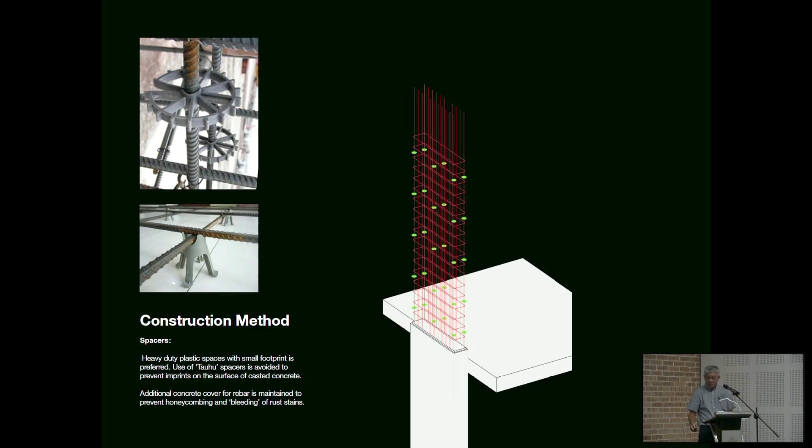Okay, this one we touch on the rebar continuity. Give you an example of PAM building. Actually, PAM building, because of being a bubble slab, it's not an in situ flat slab. That's why in PAM building you see 2 lines, the line below the slab and the line above the slab. For GDP, maybe they are smarter, using Peikko to come up with a flat slab, 200 mm thick, spanning what, 16, 18 meters.

Okay, so if you use flat slab, I think the architect and Peikko also have mentioned that we use the Peikko box. So we will cast the wall above the slab or in the same line with the slab. But for GDP, this drawing shows we are above the slab because GDP has another 150 mm raised floor. So our line will be in line with the raised floor line.

So for normal, without raised floor, I think the top of the column or the wall has to be the top of your slab. Okay? In order to get a very straight line from the top of the wall, because you're having different levels, different numbers of columns, we actually fix a timber. I'll show you the next photo. Okay, this one is, I think, the architect and Peikko have mentioned the Peikko box and the coupler, the mechanical coupler for reinforcement.

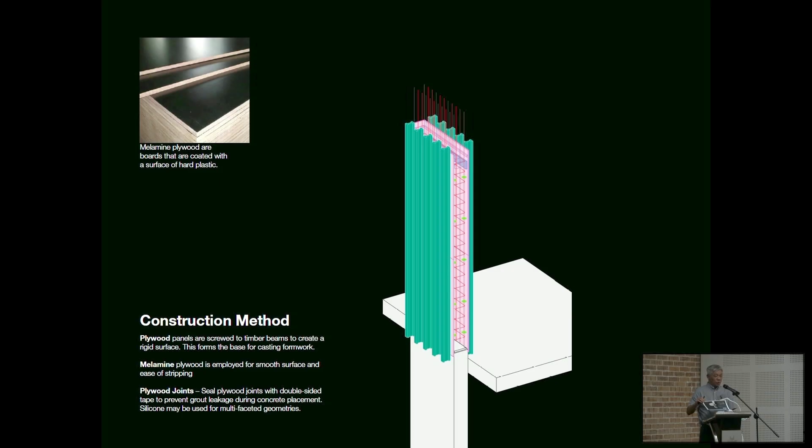When we do the plywood joints, joining two plywood together, this is only our experience. It's not something technical or specification. We actually use a double-sided tape. Before we nail the two plywood together, we line a double-sided tape, then only we put it together and we screw it. So this double-sided tape will help so that there is no concrete, water or cement flow from the plywood joints. This is not rocket science. Maybe other contractors can come up with better ideas.

Okay, as I mentioned, to get the top of the column or top of the wall straight, you have to nail a 25 by 25 mm timber, and that line has to be very straight. That will control your concrete level, because no matter how you trowel it, you cannot get it straight. So after that line, at the back of the line, your concrete can be varied. It's not too important, but the line where the two plywood join has to be straight. So we use a 25 mm timber as a guide to control the line.

This photo, I think you have seen. Not necessarily you have to use Peri, Doka, Ulma, or EFCO. There's many local suppliers that are supplying this type of formwork system. So the waler beams and the screw and the nuts, or we call the tie rods. So these tie rods have to be decided early by the architects. But there is a maximum distance that we can go because the waler cannot take the deflection of the concrete, unless you change it to the I-beam, which I think is very costly.

So there's a limitation about the screw holes. And the screw holes also, you have to make sure that it's all equal. From the plywood, each of the plywood come out, whether it's 150, 200, all this have to be decided by the architects. And that have to be consistent. If it's left 150, right 150, bottom and top also have to be 150.

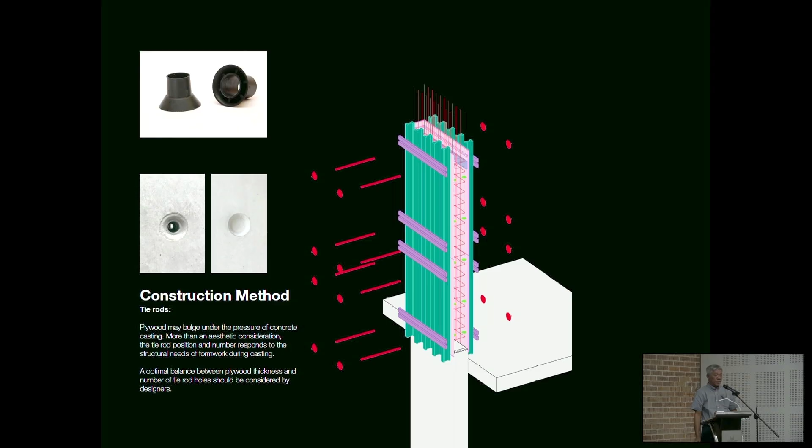Okay, for concrete casting, we encourage that we should cast it in layers. Every pour, you should not exceed 600 to 900 mm layer. Then you go on layer. If you let the concrete flow by itself, somehow you will see the construction joint, I mean the concrete flow, the joint there.

For vibration, you have to use two vibrators, one is internal and one is external, because the external vibrator will cure a lot of honeycomb and air bubbles. You will prevent air bubbles, which I think a lot of architects like air bubbles. It's part of fair face concrete as a whole.

Interfacing with architectural elements, again, the architect have to take really special care on the concrete wall joint with other finishes. We encourage to have a groove line. No matter how the RC wall joints with a brick, I don't think you can get it perfectly straight because the RC wall might not be perfectly vertical. So with the groove line, you will eliminate the joints problem.

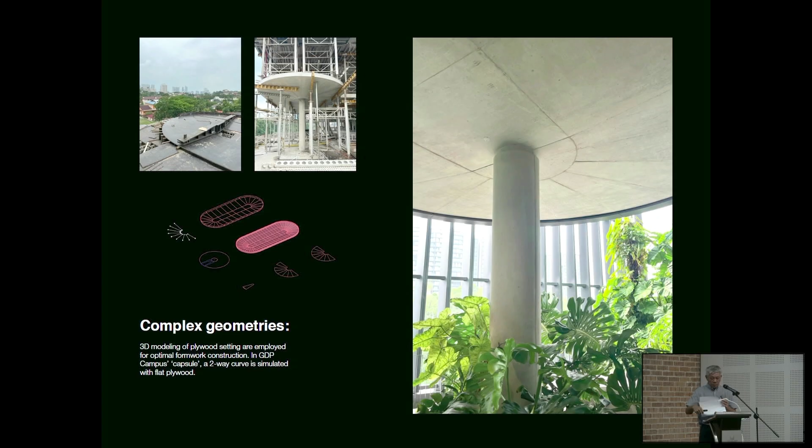Touching up. We have developed a skill, which I'm going to wash Lau's brain so that he will not know how to repair fair face concrete, because he's no more with us. You look at one of the photos, you see the concrete surface, and on the right, that has been repaired by us. And one more thing: once you remove your formwork, immediately you have to use a fine sandpaper, very lightly sand the fair face concrete down, because there's some stain which you can remove immediately, but after a week you can't remove it. This was too long. That's why we couldn't remove most of the lines.

Conclusion, that's it from me.